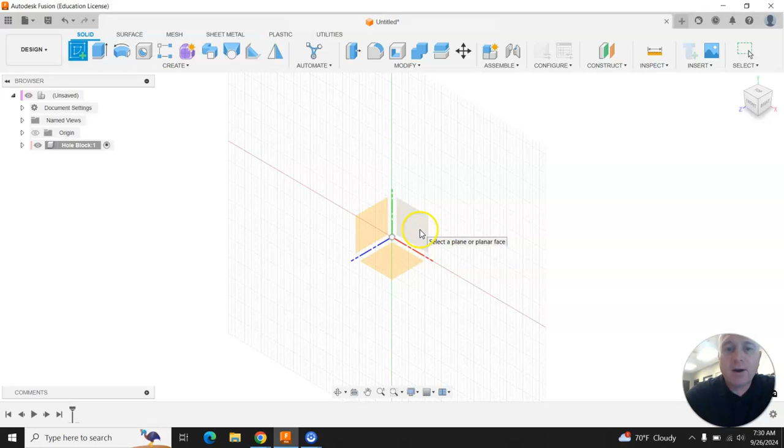We're going to make a sketch of a block. I'll do that on the front plane, rectangle tool. I'm going to make the whole block, the rectangle, 8 inches wide by 3 inches tall in the height dimension.

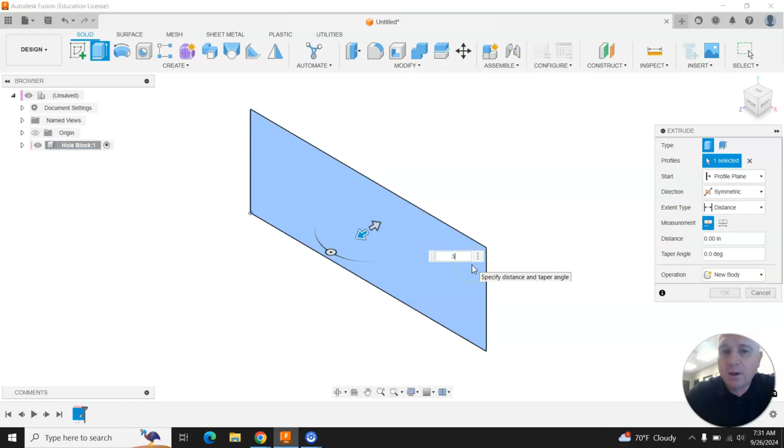I'll go ahead and finish that sketch, and I'm going to extrude the block a depth of 3 inches. Since I'm doing a symmetric, I'll type in 1.5 inches, and I'll go ahead and click OK.

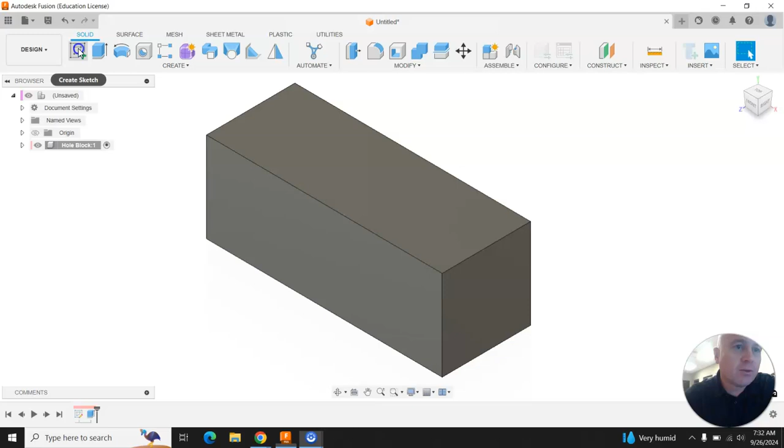Now we're going to use the point tool to create the center location for some holes on the top of our block. So I'll go ahead and create a new sketch on the top surface of the block. I'll get my point tool. I'll put it in the center and place the point. I'll then go ahead and dimension the point 1.5 inches from the edge of the block.

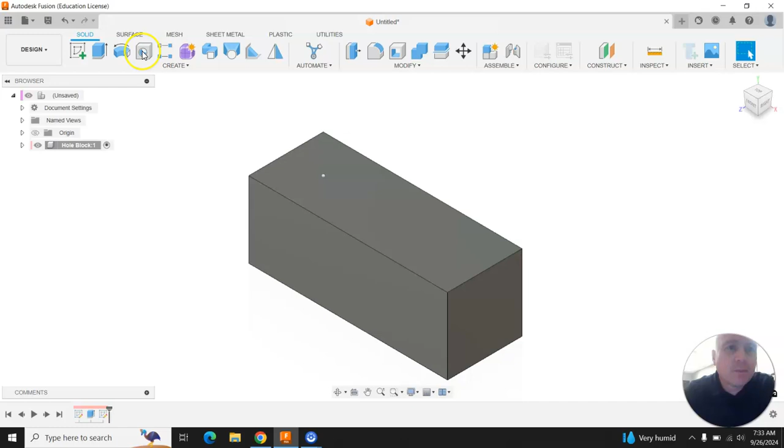Then I'll go ahead and finish the sketch, and I'll go to an isometric view so we can see the block. I'll click the hole tool, and I'll click on the point that we created to create our hole. If I go back to the drawing that we're creating, we can see that the hole has a 1/2 inch diameter, and that the counter bore for the hole is 3/4 of an inch. So we know that this hole has a counter bore.

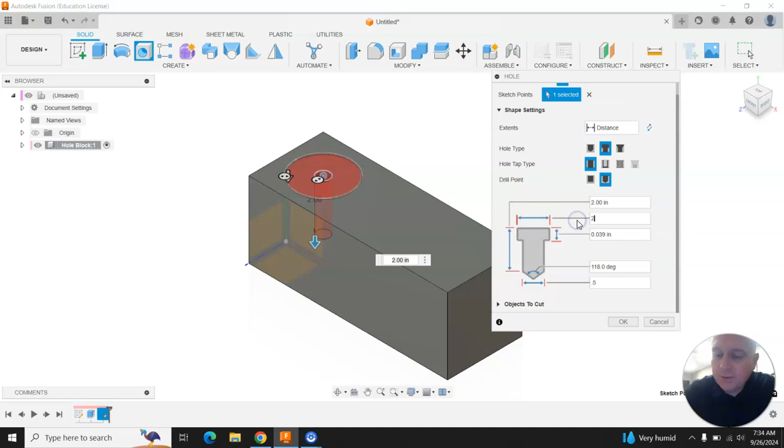So within my tools in Fusion, I'll go ahead and choose that I want a counter bore hole. The diameter of the hole is going to be 2 inches, or excuse me, 1/2 inch. So I'll change that diameter to 1/2 inch. I'll change the counter bore diameter here to 2 inches. Let's go back and look at my drawing to make sure. Excuse me, the counter bore diameter is 3/4 of an inch, so that's right here. So I'll make the counter bore diameter 3/4.

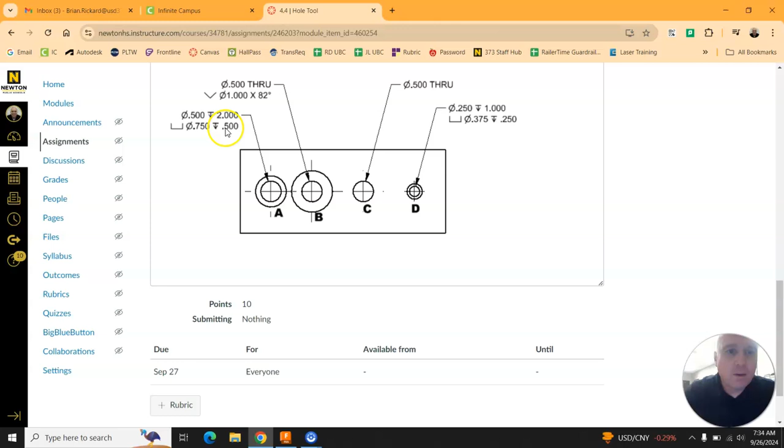The depth of the hole is 2 inches, and the depth of the counter bore is 1/2 inch. So on the hole depth here, I'll make that 2 inches, which it is. The counter bore depth is 1/2 inch, so I'll go ahead and change that to 1/2 inch. And that creates that first hole for you.

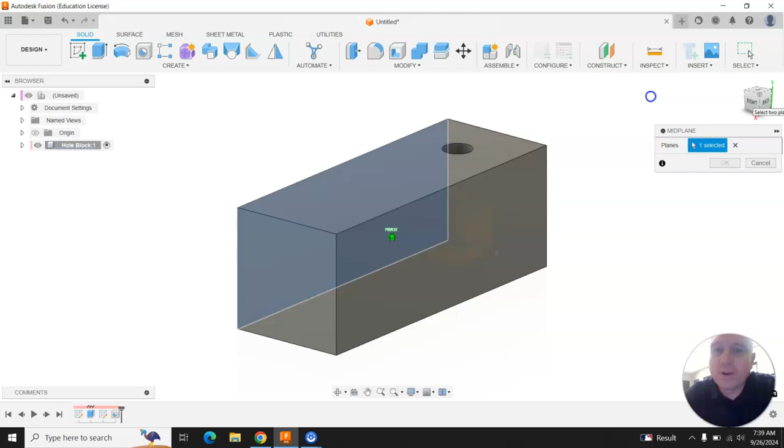Now we're going to go ahead and create a sectional view so we can see what the hole looks like on the inside of the part. So to do that, I'm going to get a mid-plane. I'm going to select the front face of the object and the back face to get a plane in the exact middle of the object. I'll go ahead and click to create a sketch on that plane.

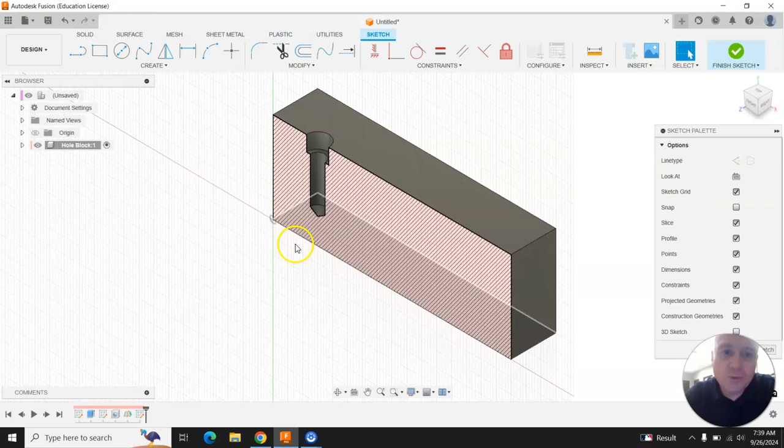And when I have that sketch created, I'm just going to select slice, and it will slice it at that plane so we can see what the inside of the part looks like. So you can see that we have a blind hole that doesn't go through the object. The depth of the hole is 2 inches. The counter bore is 3/4 of an inch, and the hole diameter is 1/2 inch. So you can see how the hole tool is used to create that specific hole.

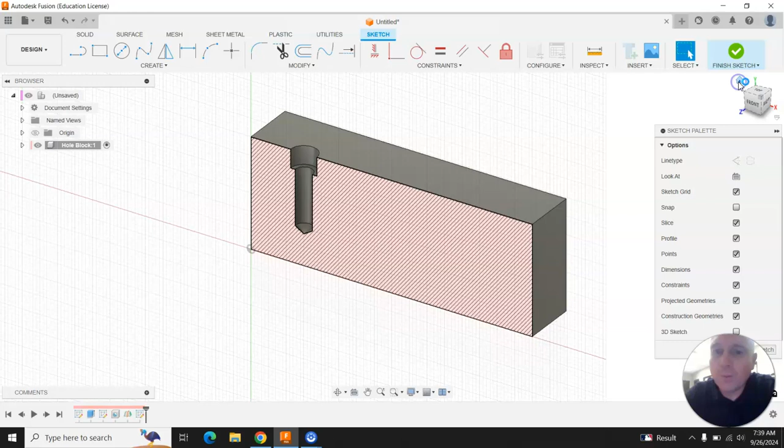You can go ahead and finish that sketch, and you can use that sketch when you need it to go back and look at the inside part of your hole block as you create the rest of the holes for the hole assignment.